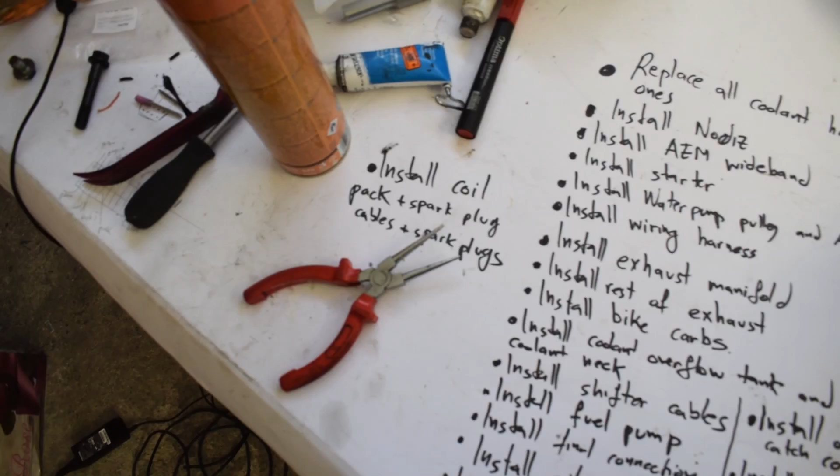Today is a big day, and today we are doing a lot of things. As you can see here, I have this little list, and on this list is everything I need to do in order to be ready to fire up my bike carb 4AG. So as you can see, I'm going to be very busy today. So I'm going to shut up and start working, and I will get back to you with some commentary and useful information during the rest of the video.

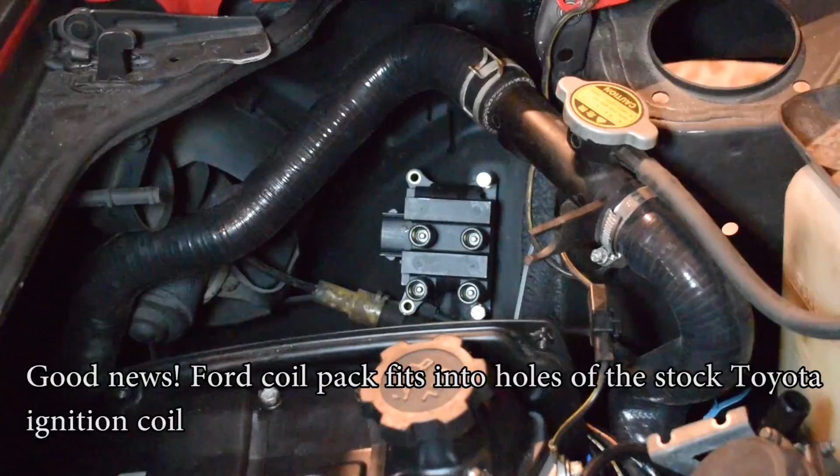Whew, okay, it's nighttime outside. Right now is 9 p.m. and some 20 minutes. I have been working on the car today, the whole day, and yesterday, the whole day. Each of these 2 days I worked more than 12 hours and I am super tired. But almost everything is done. As you can see on the list, everything we need to fire up the 4AG is done.

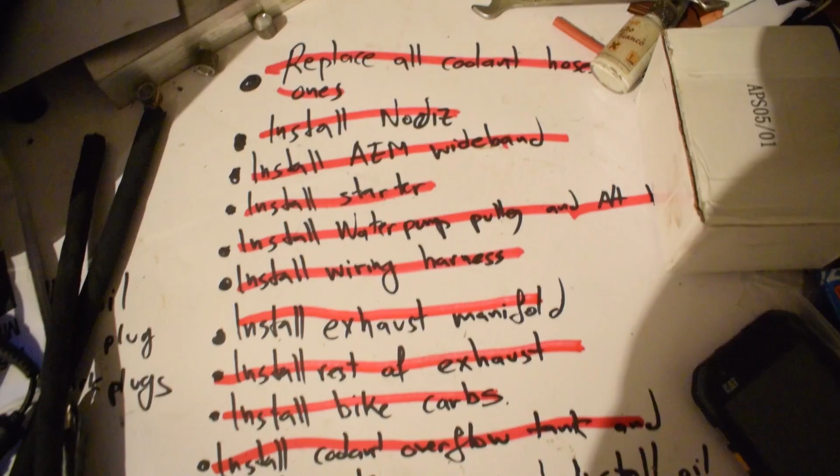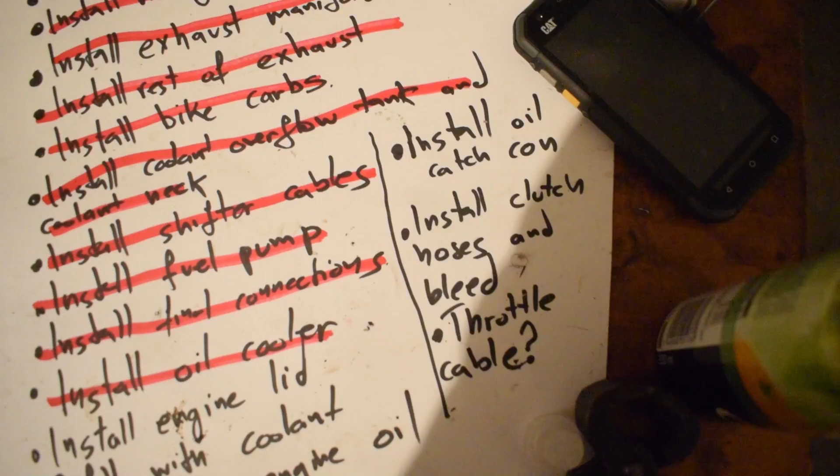The only thing I haven't done is install the engine hood because I don't need it. I haven't done anything with the clutch or the throttle cables, I do not need any of that. I will just whip the throttle with my hand, I don't care, I just want to fire the engine up. Also, I haven't filled the engine with oil and I haven't filled it with coolant. I will do that tomorrow.